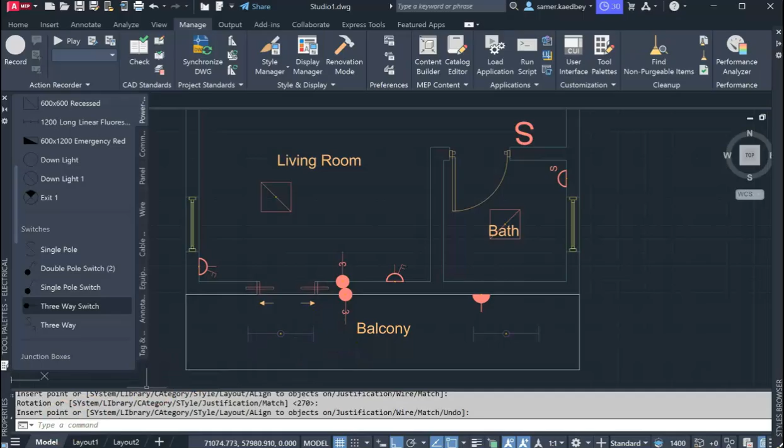So let's add the panel now. We'll go for the panel menu. Since most of the wiring will be inside the wall, we're gonna go for the recessed option.

So voltage is 230. Phase to phase is 400. For that small studio flat, this is gonna be one phase.

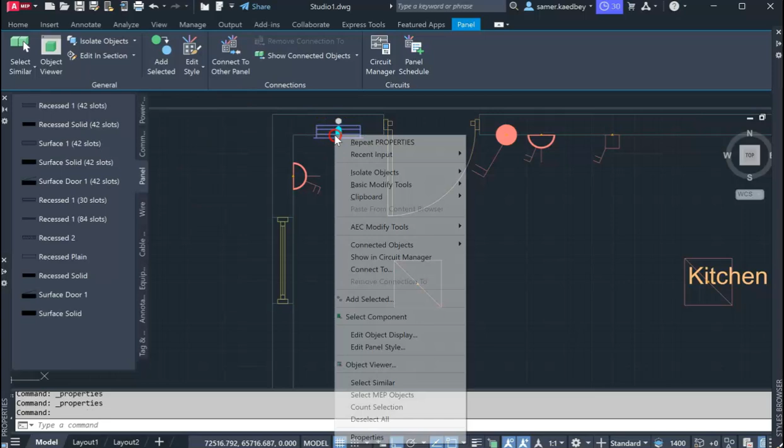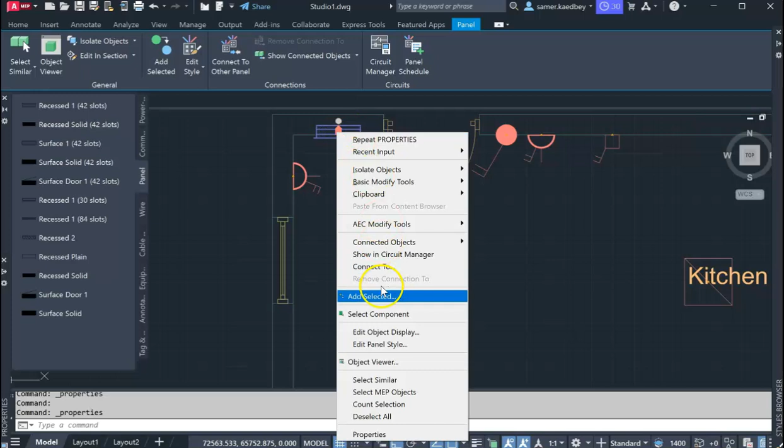Phase is one, wires. So we're gonna keep it as three wires.

And circuit breaker. Panel name - give it a brief name, maybe studio panel one.

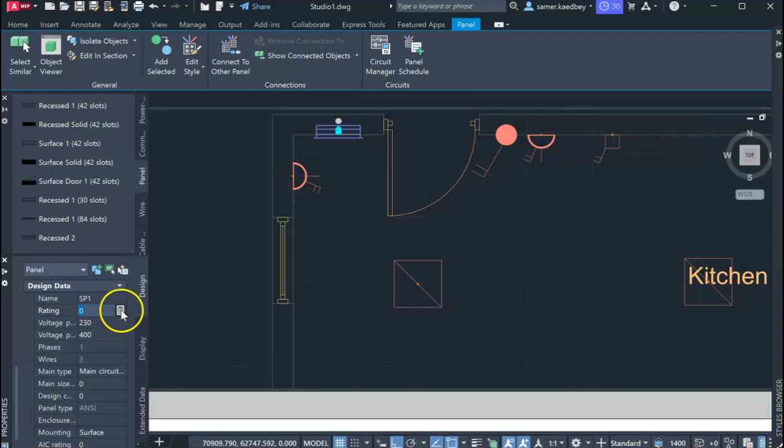Rating - that needs to be... make sure that it is capable of going up to 100.

So the main size in amps, 100. I put it as 100. Design capacity as well.

Current short circuit rating needs to be calculated, but I'll leave it for now as is. You have to make sure that this is calculated and entered as it should be.

Now, as for the fed from, we don't have any transformer in supply at the moment, so we're just gonna leave this as is for the moment.

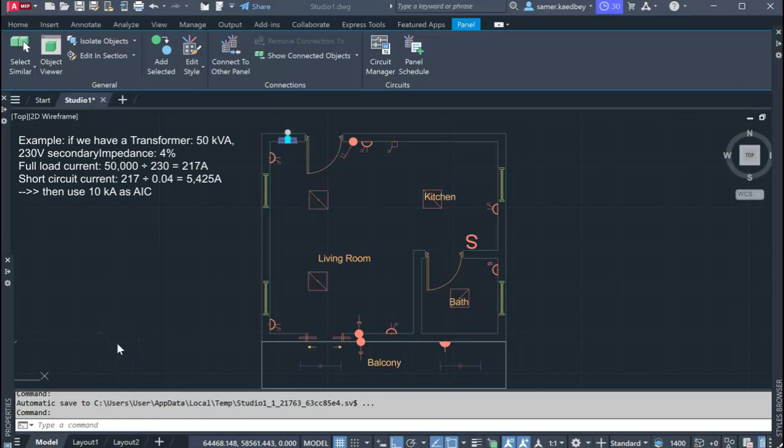All right, so now we need to determine how many circuits we want to install so that we can create those in the circuit manager.

But before we do this, I realized that I haven't put the water heater yet. So we're gonna go into device.

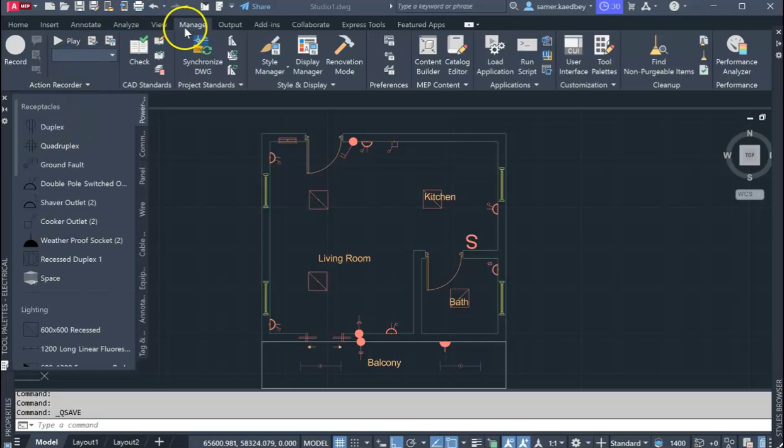If you don't have the power drawing, you could open it from here.